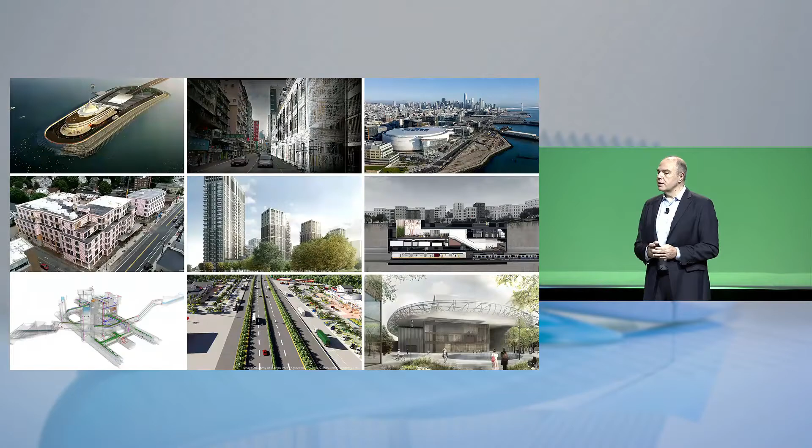Today we are going to give 11 awards to all of you, or some of you, and we are going to do 3 things. The first thing we will be doing is reward, honor and celebrate your work. We're going to give 9 awards for the AEC Excellence Awards, organized by size - small, medium, large - and then building design, infrastructure design, and finally construction.

That's the first one. The second one will be about celebrating the Innovator of the Year. This award will go to one specific person who drives innovation and process change within his or her company. This winner has been selected among close to 40 different nominees.

The third thing we will be doing is about a new award that we are introducing this year, the Future of Making Award. In this case, we want to celebrate a company that has been driving automation and new technology and has innovated in the world of AEC. That's a new award that we will celebrate as well.

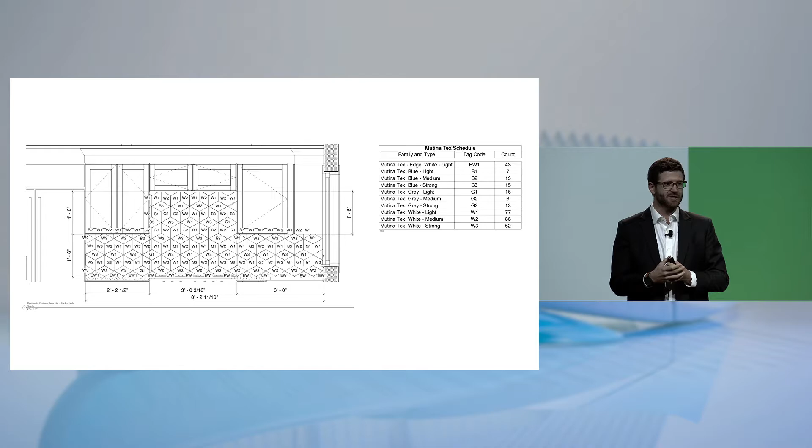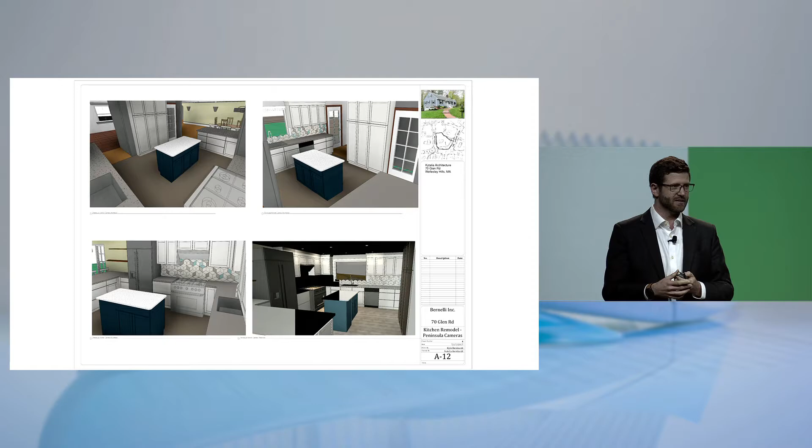We did that in BIM 360 Design, and my contractor definitely thought I was crazy when I handed him a URL in BIM 360 to actually place each one of those things manually. But what we learned, and what I think these awards will tell you all, is that some time invested to author the construction intent of your design digitally helps to make sure the end result is what you want, and that is perfection - with one small detail, and that is I forgot to include my kids' dirty dishes in the LOD 400 BIM that I created.

So I'm going to need to put that in the punch list in BIM 360 for my next update, and probably spend about 8 or 9, 10 cloud credits to re-render the whole scene. But if you like my work, I got to be honest with you guys, because I've been working with Nicola for like 13 years, as he mentioned, and I'm always open to new opportunities, so call me.

But let's get into our first winner here. So we're going to start in the infrastructure segment, as Nicola mentioned. So let's switch over here.

As a parent of 3 kids, I have a special affinity for well-placed service centers on a highway, because my kids need to go to the bathroom all the time. And that's exactly what our first winner did, they used digital technology to help lay out an entire highway line. So let's welcome to the stage the winner of our first award, a small infrastructure project: engineering of the Luchuan service area of Yulin Zhanjiang Expressway. So please welcome up Tianjin Port Engineering Design and Consulting Company and CCCC First Harbor Engineering Company. Welcome to the stage.

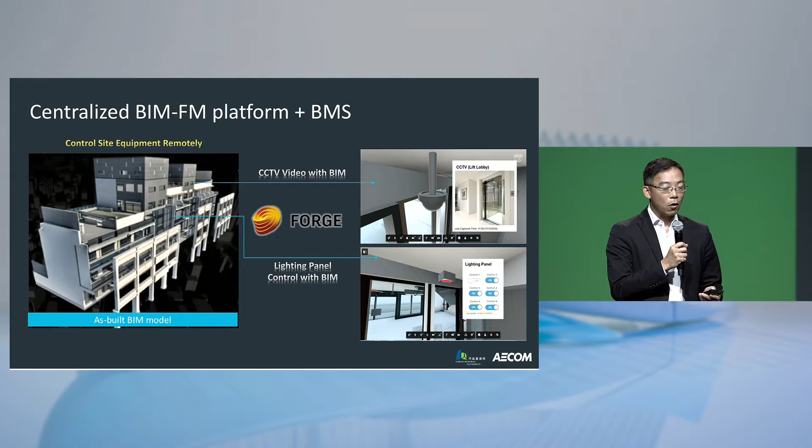So this is some sneak peek of our project, the screen layout. This is the first page of our project. Project stakeholders can make use of this dashboard to navigate to every single project within the platform easily within a map click.

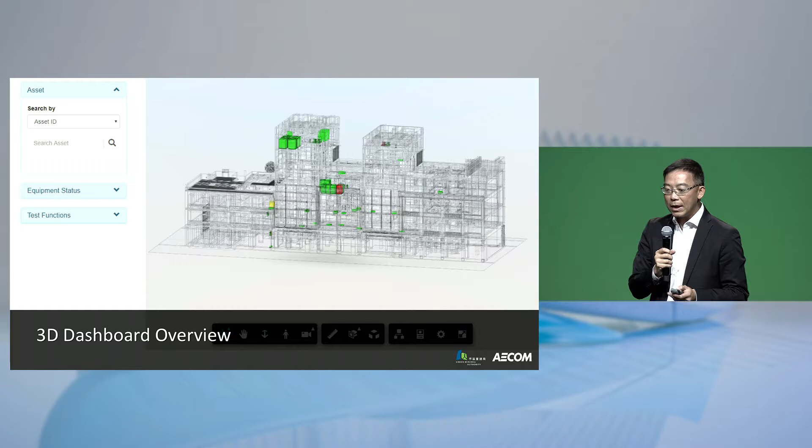And this is a 3D dashboard overview, which is a highlight for the project. We will have all the real-time equipment information showing on this 3D viewer, which is a Forge viewer, and then we have all the real-time information pop up to show you the status of the equipment.

So to conclude my presentation, I'd like to share with you my project video.

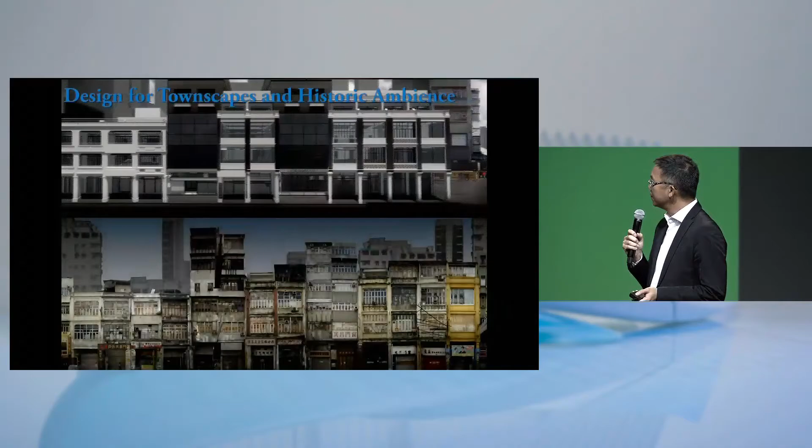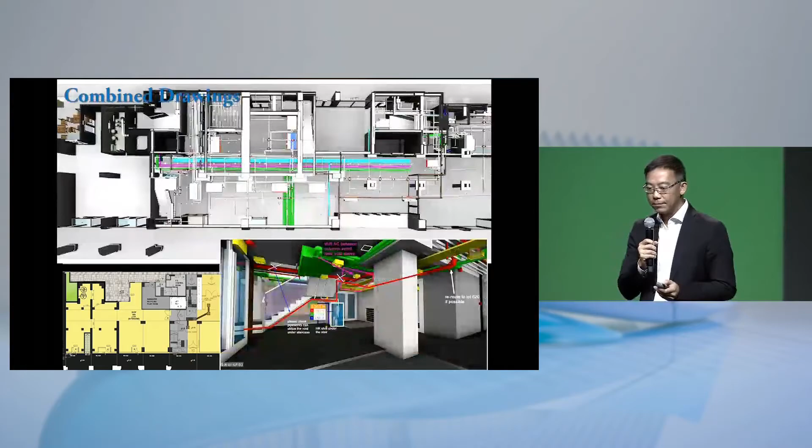So this is the old days. Actually, we have a lot of historical stuff like the columns we have to preserve. This is an early stage adoption within design and construction stage of BIM technology. We also did a lot of analysis like the solar analysis, shadow analysis, and of course clash analysis and drawing production. And it becomes the integrated platform on the cloud with Forge Viewer.

Yeah, this is a very congested area within Hong Kong.

So this is the video viewer that I mentioned to you with all the real-time information pop-up, the live CCTV feed and the dashboard information.

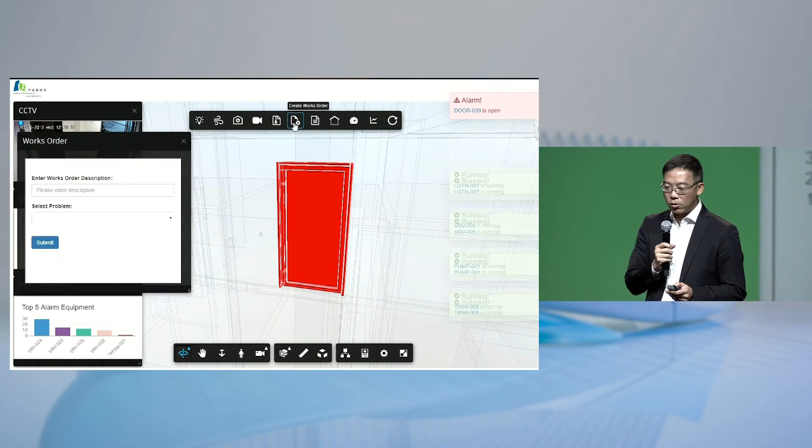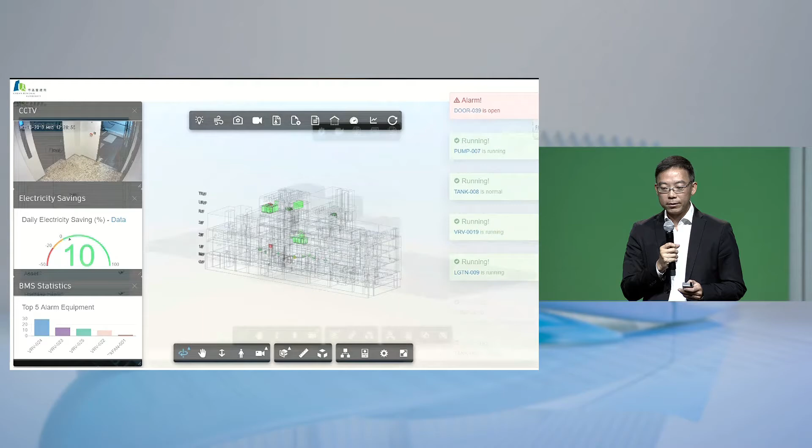So this is an asset history with all the manuals connected to the system. The frontline staff can review all the information easily within a few clicks on the viewer.

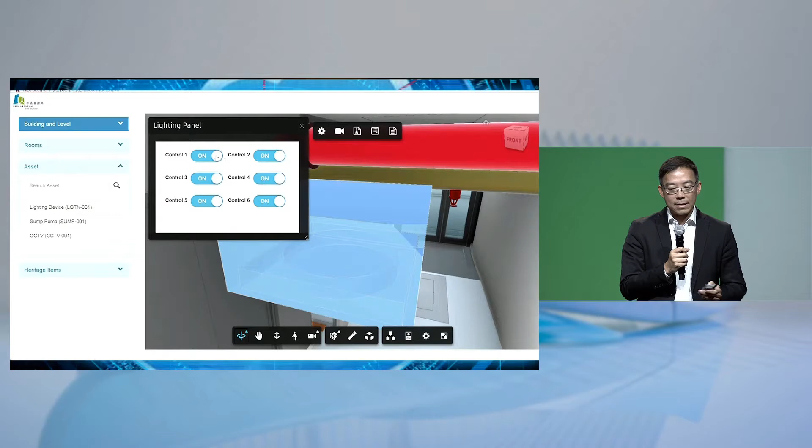And we also connect to all the BMS sensors so we can connect and control the lighting, air conditioning, and all the BMS-enabled sensor equipment. Toilet is one of the very important things that we have to monitor because it's a public accessible building. So this is what we have prepared for the last year, the project.

The system will be available by end of this month together with the building. But this is just the start of our smart building journey because there will be a lot of buildings joining the platform in the near future. Thank you. Thank you again, and thank you Autodesk for the award. Thank you.

That was a great illustration of how investing in Forge and the Autodesk ecosystem can help you do great things. So for our next winner, you'll see how modular construction can help a project work like clockwork. The project team took an advanced tech-first approach that used drone mapping, laser scanning, 4D planning, and mixed reality. They did it all in my backyard of Beverly, Massachusetts.

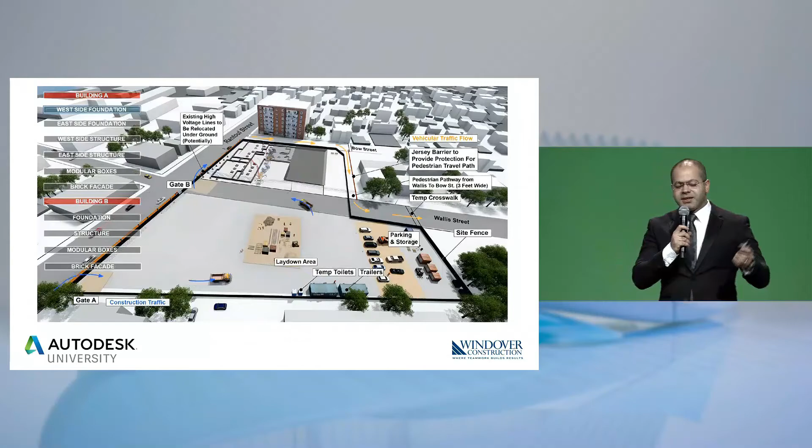Windover has been a leader in modular construction. This project is 184 boxes that got placed for 2 buildings. Building A, as you see down there, is the U shape, and building B is the smaller one. So what we did is that we placed all the boxes virtually first before we put them on site to make sure there are no surprises on site.

So the challenge for this project was that, as you see here, this is an aerial view, this is building A and building B on the other side. The challenge we had on that project was that we have a steel structure podium on the first 2 floors holding up the 6 upper floors that are modular construction. So we have 2 different structural systems that needs to be in harmony together, very well coordinated.

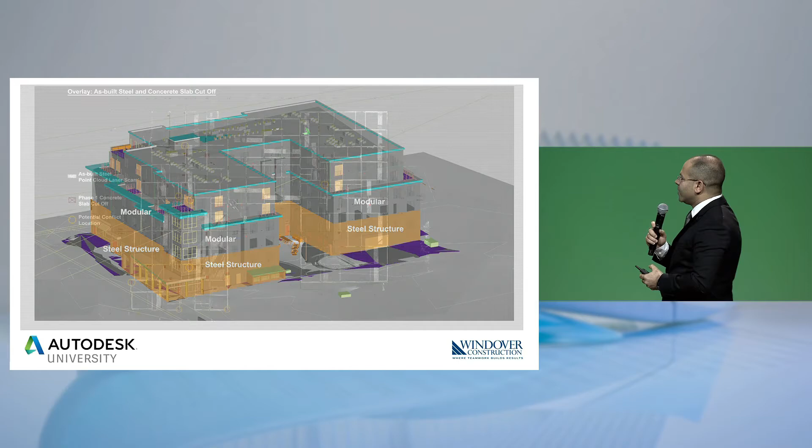The first 2 floors are coordinated through the regular plumbing system with pipes going up through the vertical cores, and the upper floors are made in a controlled factory setting to control quality and get the boxes ready in the factory. So what we did is that we made sure to coordinate everything by capturing on-site as-built steel. So we are not coordinating with drawings for the steel, we are coordinating actually with the as-built steel on site.

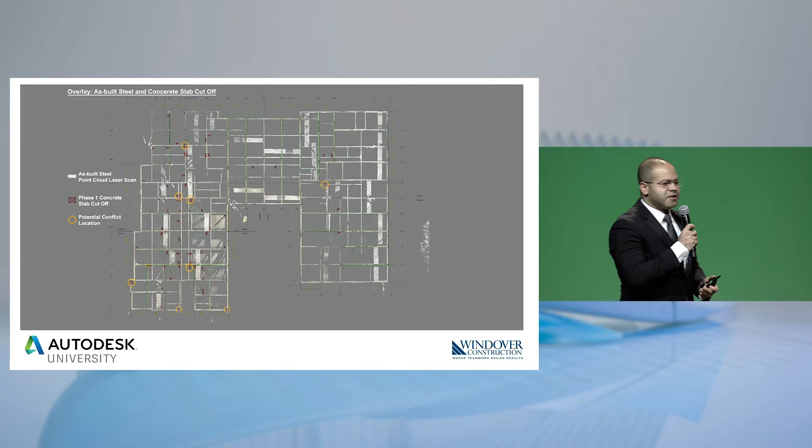Every time we had the steel structure erected on site, in 6 phases, we'd fly the drone with controlled survey points on the ground. The drone captures the aerial view of the as-built steel, and we supplement that with scanning on the ground to capture whatever the drone didn't.

We combined both point clouds in ReCap Pro to get an accurate representation of the as-built steel on site. Then we took that further and modeled in Revit all the MEPs for the lower and upper parts. We communicated after each of 6 flights over 2 months in phase meetings with the factory making the boxes. When we overlaid the data, what you see in red is where the factory was planning to put their vertical shafts.

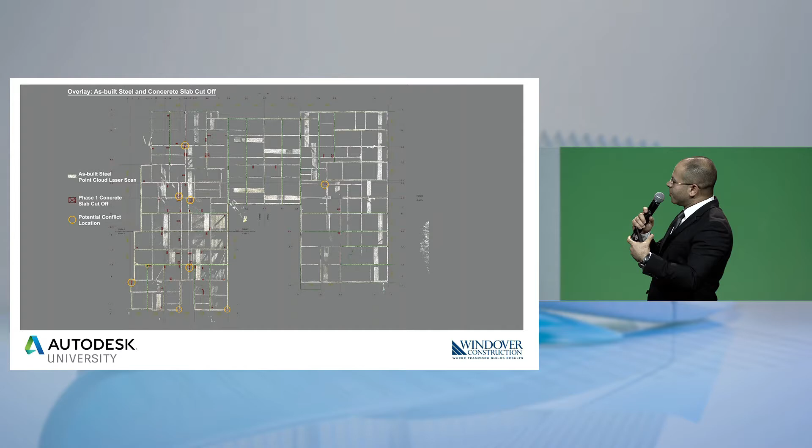We were able to overlay that in real time with what we captured on site to help detect conflicts early in the process. We made sure that when we placed those boxes, everything fit perfectly between the lower part built on site and the upper parts built in the factory.

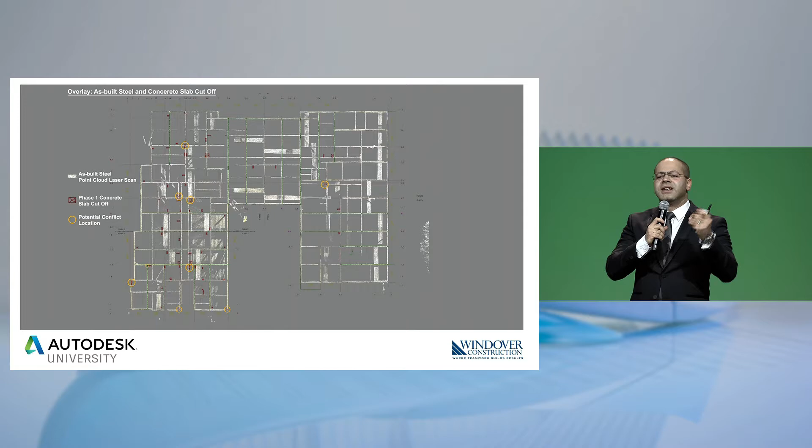Another innovative way we used Civil 3D was to get the spot elevations for the facade. When we place those boxes, sometimes the facade isn't very smooth. So in real time, we communicate to the facade team the strapping thickness through laser scanning the facade, using a laser scan accurate to within 3 millimeters every 70 meters.

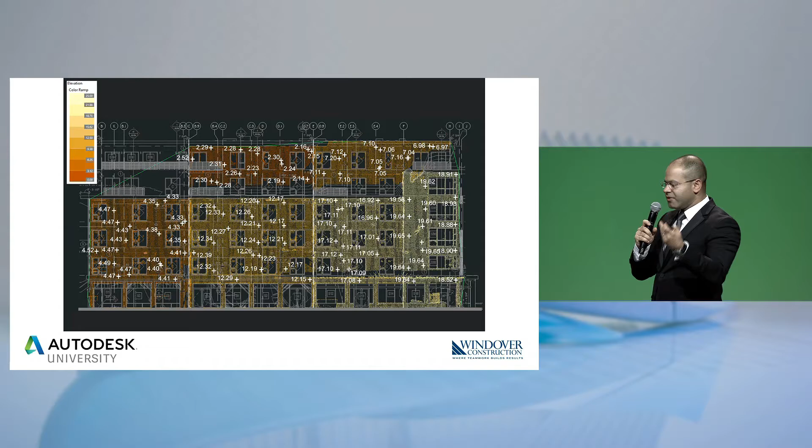We were then able in Civil 3D to detect the spot elevations and communicate that in real time, ending up with a high quality facade that preserved the design intent, very smooth. We also used BlueBeam on that project. Our superintendent Dustin loves BlueBeam because it helps with collaboration on site and really helps with real-time communication.

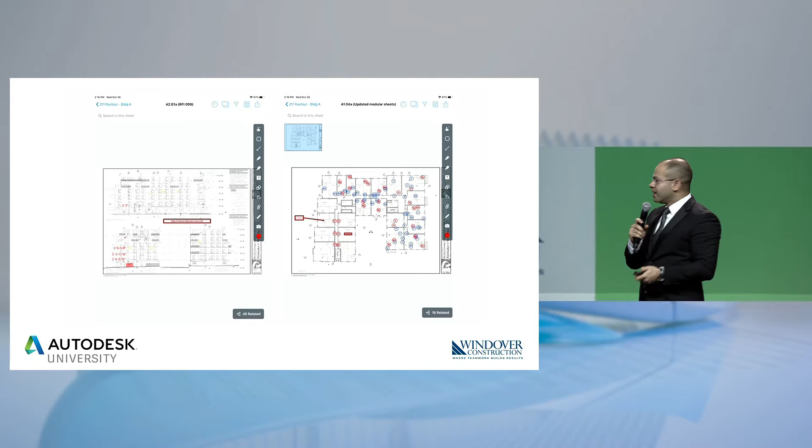That was our project, and it wouldn't have been possible without mastering all the Autodesk software and the great options we have. We used AutoCAD for early drafting. We used ReCap Pro for combining drone mapping and laser scanning to get an accurate representation of the site, combining drone maps with laser scans from below at different tolerances.

That was really amazing to have these together. We used Navisworks for MEP coordination, Civil 3D for spot elevations and for handling the contour maps and contour lines we captured from the drone, for early excavation work, monitoring, and keeping track of construction progress. And 3ds Max for animations, 4D, and visualization.

Revit is where everything starts. When we build those 3D models, it's all in Revit - it builds these information-rich models. And of course, BlueBeam. So thank you so much.

We're glad to be part of this - modular construction is transforming the construction industry, making it greener and more efficient. What Windover is doing is transforming modular construction planning to help build better and safer. Thank you so much.

That was really cool. I love modular design. It's really obvious that's going to be part of the future of making - something we talk so much about here at Autodesk University. So let's switch to our next project, which reminds me of one of my lifelong battles, starting in 4th grade and continuing till right now - the battle to deliver the coolest virtual city.

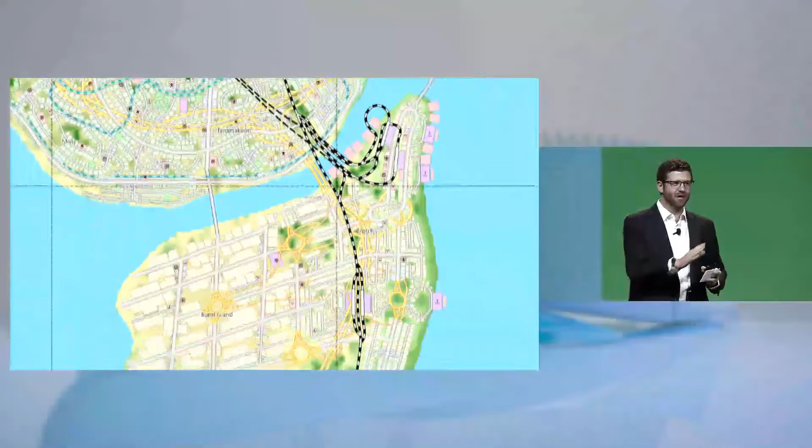They designed a 16-kilometer rail line that had to connect to 5 existing metro lines. Some of this was virtual, but in a very real world. Congratulations to the winner of our Medium Infrastructure Design Award: the Istanbul Rail System Design Services Phase 1, by Yüksel Proje and Istanbul Metropolitan Municipality. Congratulations.

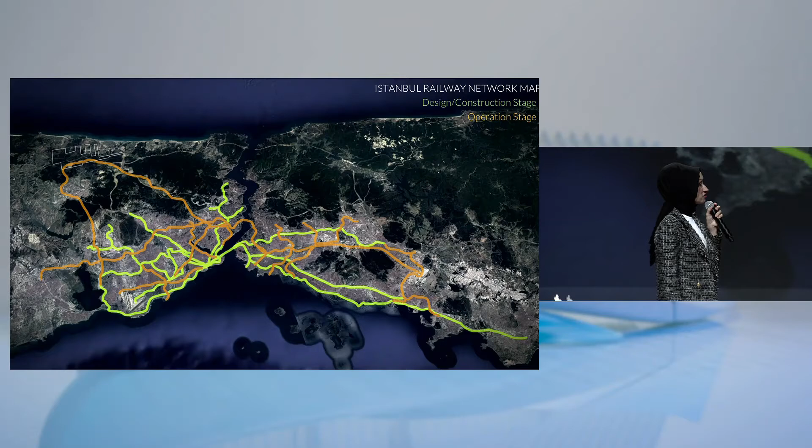As the Istanbul Metropolitan Municipality, we are working with dedication to solve these problems. The Istanbul Metropolitan Municipality is committed to developing a high-tech public transport network by implementing innovative and sustainable solutions. With this motivation, the railway system in Istanbul will reach approximately 450 kilometers within 5 years.

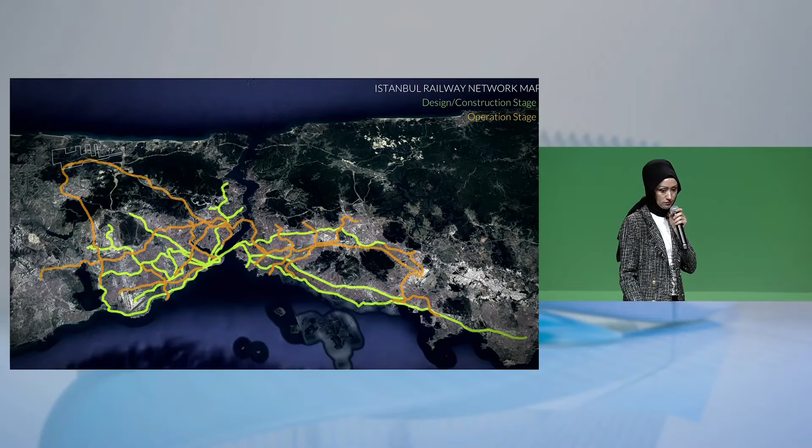Istanbul Rail System Design Services plays a vital role in achieving this goal. It involves the design of different rail system lines with a total length of 60 kilometers. Phase 1 involves the construction of a 16-kilometer metro line, comprising 11 stations, also integrating with 5 existing metro lines.

The project includes the collaboration of different entities, development of feasible solutions, implementation of operational and maintenance activities, while increasing technological knowledge. Most importantly, we reached our highest level of work through integration of all of these aspects and experience at the beginning of the design. Our main objectives were smart transportation leading to smart cities, sustainability, building information modeling and innovation, 12 different disciplines, multiple locations, 100+ models, and 20 Autodesk tools. And the result is, let's have a see.

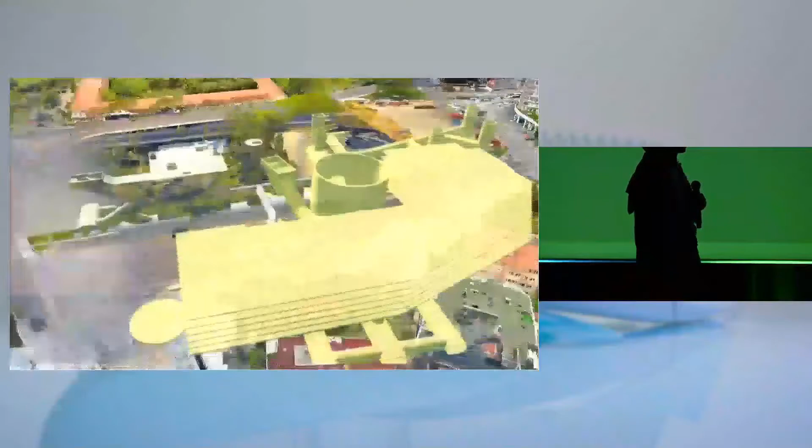Such a nice film, isn't it?

Not everyone is with us today. I would like to thank my friends who participated in this project, my colleagues at Istanbul Metropolitan Municipality, and the designers from Yüksel Proje, as you see. Also, I would like to take this opportunity to thank Autodesk Turkey, Özgür İleri and Niyazi Kemer, especially for their encouragement and support. I strongly believe that we have achieved this success as a team. Thank you very much.

Leave it there. You can leave that there. Okay, cool. Thank you. Awesome. I'm gonna leave it here.

So I couldn't help but notice BIM 360 design and specifically design collaboration in that video. That's awesome. On behalf of the team that I worked with to help build that, it's great to see that being used out in the real world.

So let's switch gears here a little bit and think to the times we've worked with owners. I don't know if anybody in the audience can remember a time an owner asked for 3 months extra time on their project. Can anybody think of a case where your owner said, I want my project to take longer? Yeah, I can't think of it either. And this next project actually shaved 3 months off the overall schedule time. So let's get right to it.

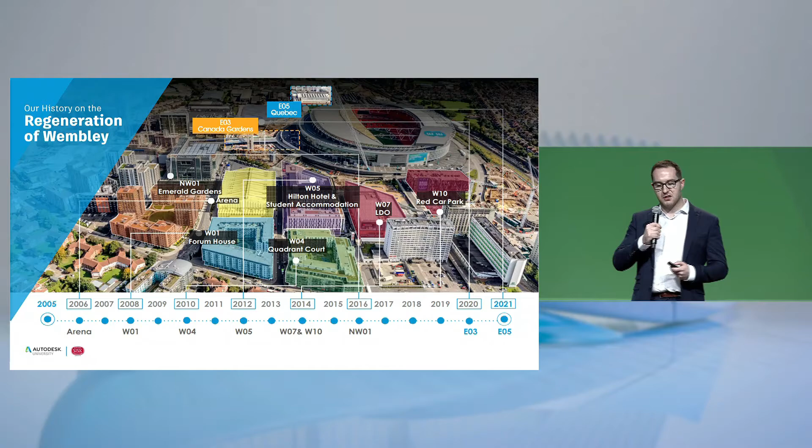Currently, we have 2 live projects with a total build cost of £425 million. Our ongoing projects within Wembley Park are 2 high-rise residential developments, set to provide an additional 1,200 residential units to the area. Today we'll be focusing on the larger development, E03 Canada Gardens, where we ran our trial using BIM 360 to create a set of digital smart containers.

The project itself is 743 PRS apartments spread across 7 different buildings. It's got a landscape podium, an energy centre to provide district heating to the whole area, and a coach park which will have the capacity for 81 coaches on an event day.

Data is the new oil. It's only useful when it's refined. The main challenges we faced came down to the efficient refinement, access, and sharing of information throughout the site. These challenges included getting information to operatives on site with relative speed and ease, the lack of live information available, no access to 3D information on site, ensuring all the information is accessible within one platform, and limitations with communication between project sectors. Drawing from our philosophy, our goal was to ensure the management of this information created zero inefficiencies throughout the life cycle of the project.

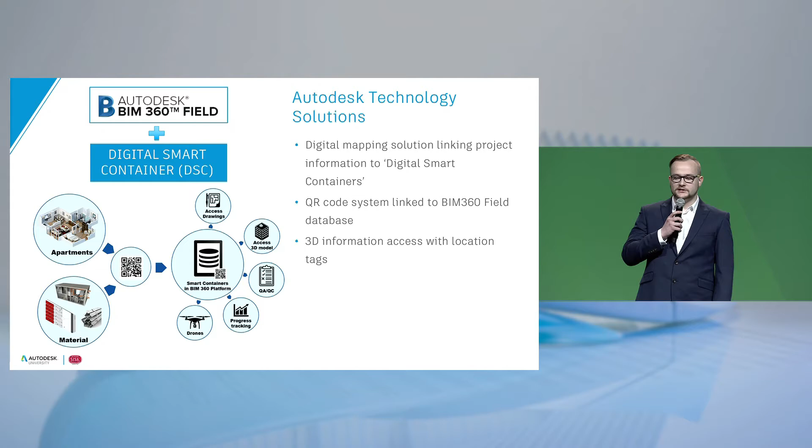We accomplished this by utilizing the capability of BIM 360 Field to create the aforementioned digital smart containers. By hosting these within BIM 360, we can access all relevant data by scanning a QR code associated to a flat or material container, giving our team access to the latest information relevant to their location on site, along with access to live tracking and dashboards of materials and spaces.

To effectively manage this new process, we developed a cloud-based API with support from Autodesk to link all the data from our CDE to BIM 360 automatically, and provided all of our site operatives with digital tablets. Shown here is an example of our live project dashboard, where all the information from site can be summarized into easy-to-view infographics and filtered to whatever level of data you require.

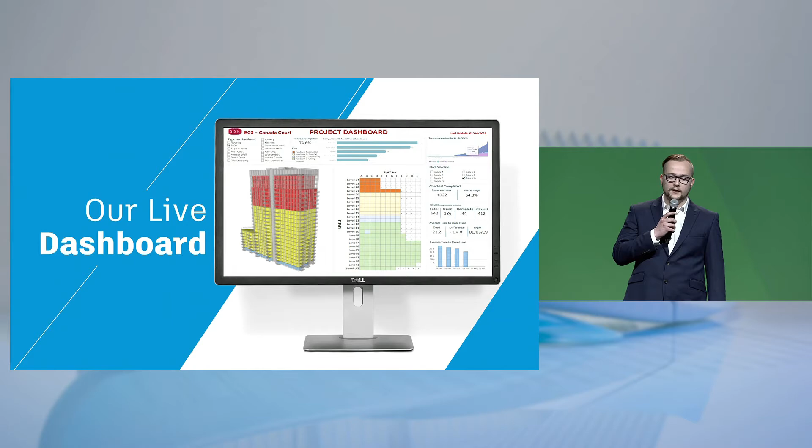From the implementation of these new processes and workflows, we were able to achieve a 35% time saving whilst conducting our QA/QC process versus traditional methods. This saved an average of almost 14 hours a week per user, freeing them up to perform more high-value tasks and ultimately enabling them to go home and spend value time with their loved ones. We are currently in the process of handing over another block from E03, and we are 4 weeks ahead of schedule.

We at Sisk are also committed to the principle of sustainability. The use of BIM 360 has made it possible to reduce the paper usage on site by a massive 44%, around 19,000 A3 pages a year, contributing to a yearly reduction of CO2 of almost 150 kilos. This has also made us the first Sisk project where the snagging process is 100% digital.

Using the live project dashboards to display the information from BIM 360 has increased project management efficiency by 15%. All of the information is in one easy-to-navigate place, eliminating the time taken searching for and updating trackers and spending meetings updating the project team. There is one source of truth for all project information.

Finally, we have achieved an overall production efficiency of 21%, as shown in the table below. Our subcontractors are steadily becoming comfortable with the new system, and in the first 5 months, the time to close any issues in the project fell from 30 days to 20, and we are well on course to hit our 35% reduction by the end of 2019.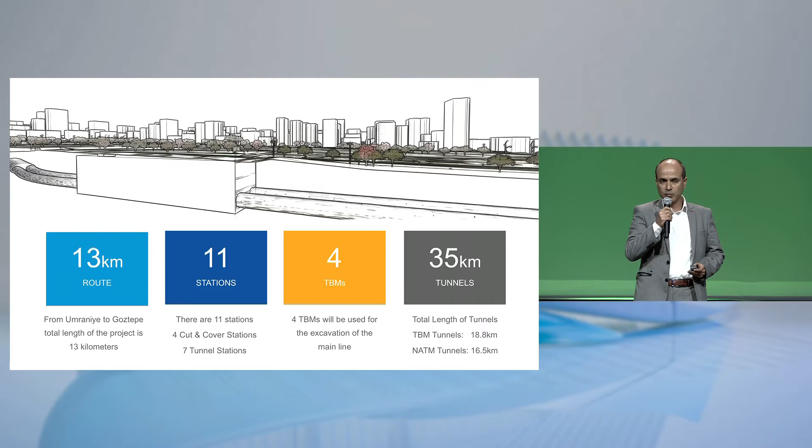Our line is about 13 kilometers long with 11 stations and a depot for maintenance and stabling of the metro trains. Mainline tunnels will be bored by 4 EPB type TBMs, and station tunnels will be bored with conventional tunneling method. This is a turnkey project which consists of design, construction, finishing works, track works, electromechanical works, signaling, and commissioning of the line.

Istanbul is one of the most crowded cities in the world, with around 20 million population. Like other populated cities, one of the biggest problems in Istanbul is traffic. Daily movement is about 13 million, and 25% of this movement is carried by metro systems. This is a figure to be increased.

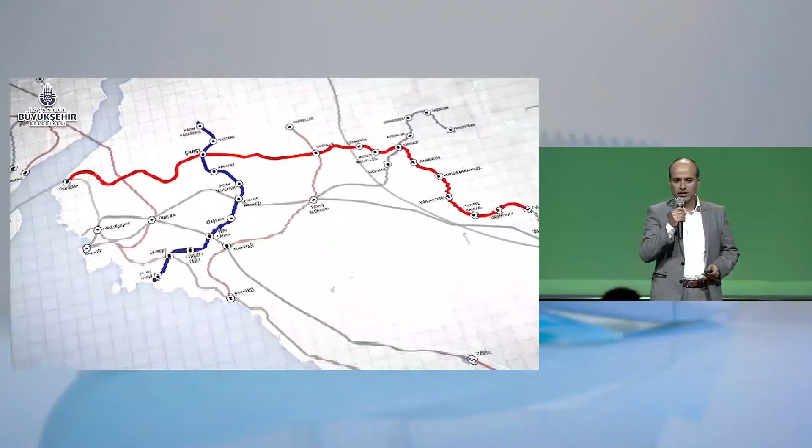Our line will play an important role to increase capacity of rail transit system in Istanbul due to its special location. Current metro lines, shown in red color, are located in east and west direction, and our line, shown in blue color, is designed in north and south direction. Therefore, our line will have intersection with 4 metro lines at the same time, and will have a big contribution to establish a metro network in the Asian side of Istanbul.

Capacity of the line is 44,000 passengers per hour per direction, and total daily expected passengers is about 500,000.

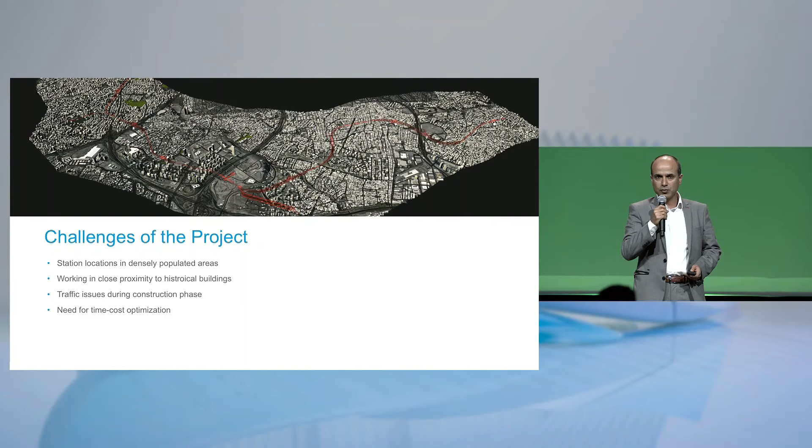As may be expected from a large-scale metro project to be implemented in Istanbul conditions, our project contains many challenges. Some of these challenges are as follows: north and south sides of the line are passing under mostly populated residential areas, and the middle section is near finance and business centers. Tunnels to be bored in the project will pass under approximately 1,600 buildings.

Due to dense placement of the existing buildings, the only available places for construction are existing roads and limited spaces between buildings, which is a big challenge for construction. There are also some historical buildings like mosques and station buildings under the effect area of the tunnels, where special care is to be taken during tunneling.

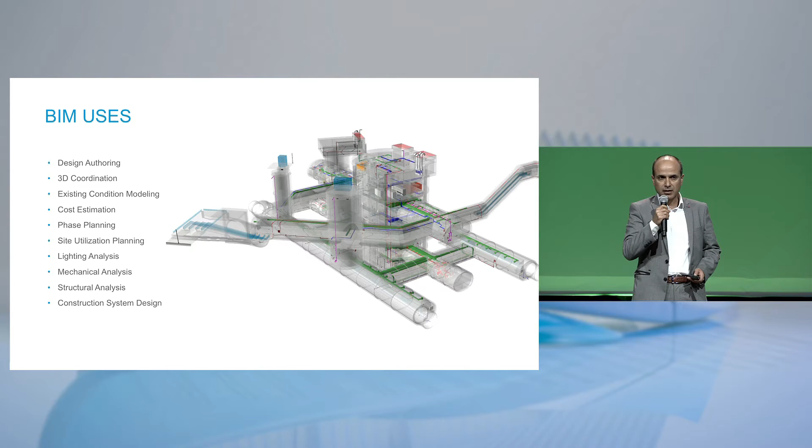BIM technology helped us to overcome the mentioned challenges effectively. Autodesk solutions made every step easier for us to implement BIM uses. Using related software, 3D information models were created. Interdisciplinary coordination was provided by using these information models.

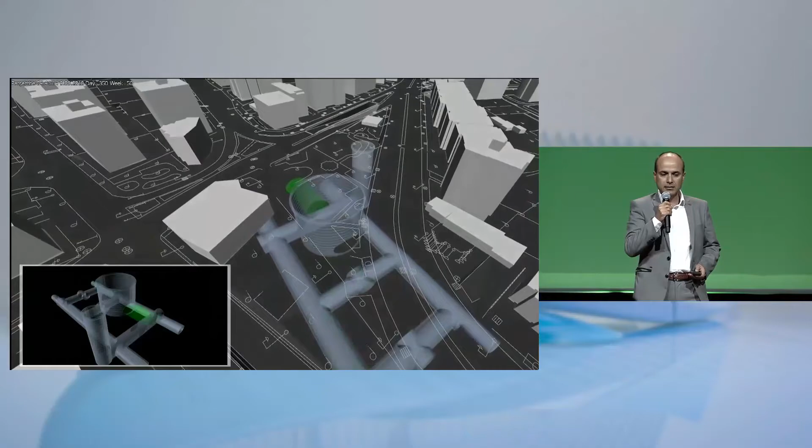These models helped us to overcome overspending and time loss during the construction phase and design phase. Construction and site utilization plan was made by using 4D simulations. Since headquarters of the contractor and the designer are in different cities, cloud solutions played an important role for collaboration and coordination of the companies.

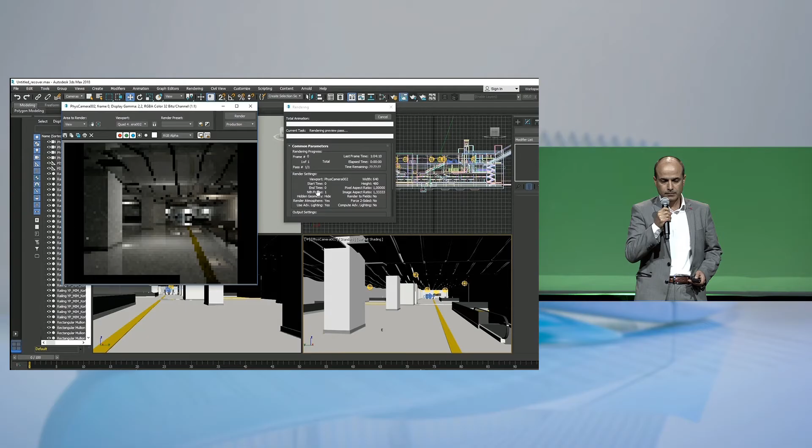At the end of this process, it was clearly seen in design stage that BIM technology provides cost saving, and it is also avoiding time loss. Errors and repetitive works were minimized, and collaboration and coordination were maximized between stakeholders.

Thank you very much again for this beautiful award and this great organization. This will be a great contribution for our BIM perspective. Thank you very much.

A common thing we've heard throughout all of these winners has been collaboration. And so our next winner takes that to the next level. There were 13 different member countries as stakeholders involved in this project.

It actually reminds me a little bit of a project I did with my fabricator. We designed a shed in Revit, and then we built it in a prefabricated way. My crew, which was my kids, they helped really well on this one. It was fun, we're very happy with the end results. Again, just a reminder, I'm open for any feedback, feel free to reach out to me because this is really cool stuff. But enough of that, let's jump to the next winner here.

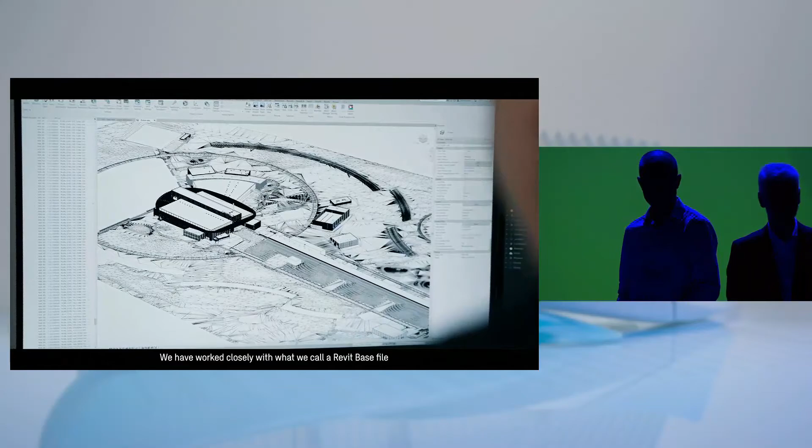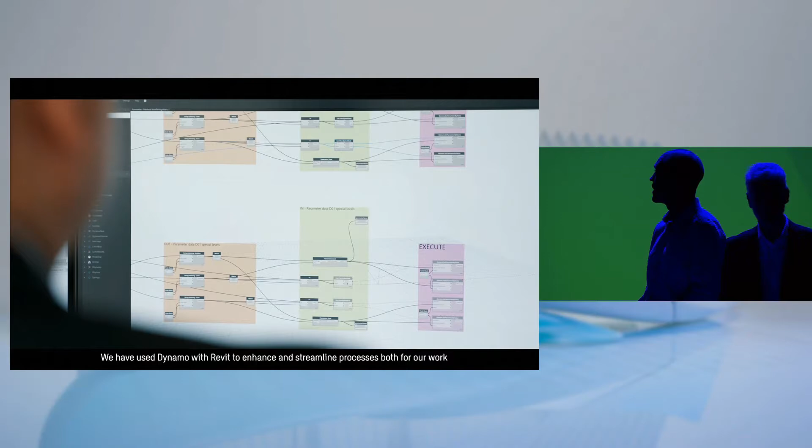This is a master file that contains everything that the designers need to deliver according to the requirements of the project. We have used Dynamo with Revit to enhance and streamline processes both for our work, but also created scripts for the designers to use and enhance their productivity. This process has enabled us to optimize time in several areas of the project.

For collaboration, we have regular coordination meetings with the designers and stakeholders. Navisworks Manage have been the main tool for clash detection and design review during the design and construction phase.

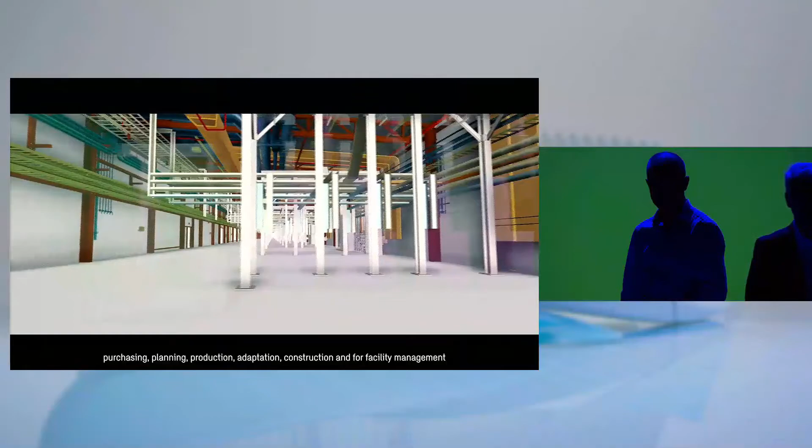In the project, we have worked with information chains. We use the same models throughout the process for design, calculation, purchasing, planning, production, adaptation, construction, and for the facility management. We have also developed software and processes that help us with the review of models, documents, and drawings.

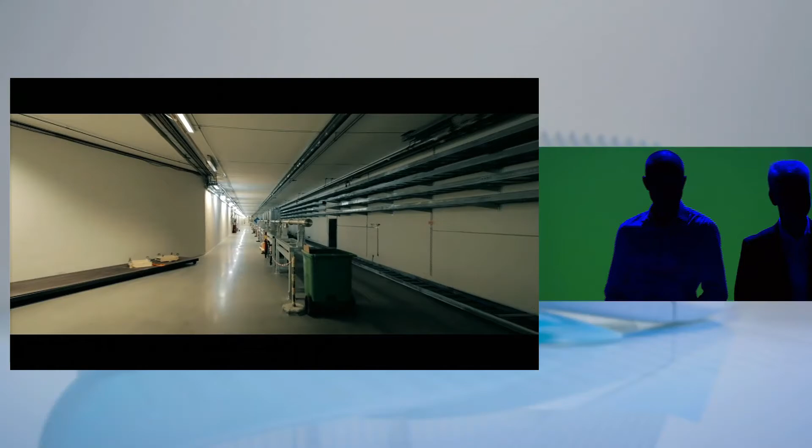3ds Max and Unreal Engine have been used for visualizations, movies, and virtual reality. Utilizing Navisworks combined with 3D Studio Max and Unreal Engine enable us to import stable models in virtual reality, which were used in the project as a tool for collaboration.

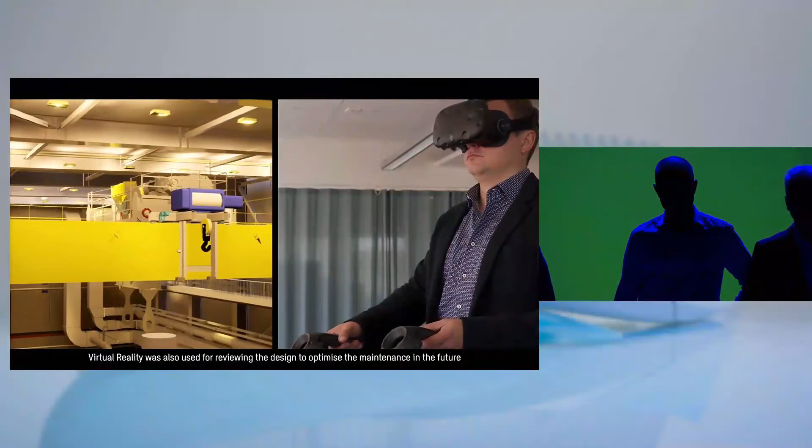Together with the client, we have explored and designed the future work environment inside virtual reality. Virtual reality was also used for reviewing the design to optimize the maintenance in the future and to be able to see where equipment best could be placed.

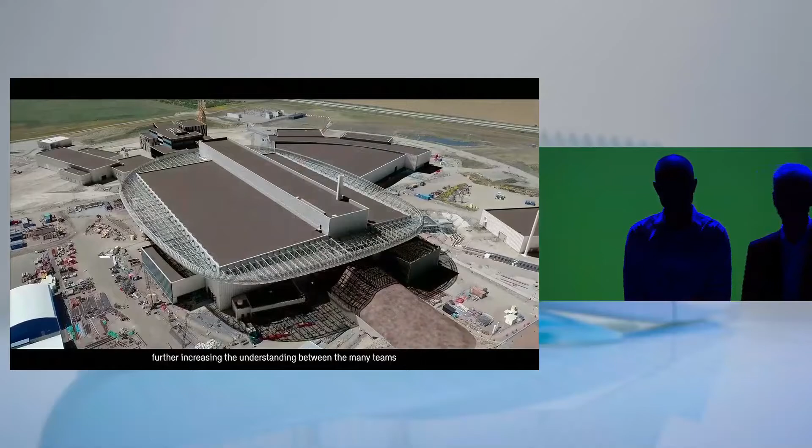Using camera 3D tracking with a drone enabled us to visualize the 3D model designs and actual surroundings many years prior to completion. Rendered contents from 3ds Max proved beneficial regarding the communications between design, contractors, stakeholders, and board of directors. With camera 3D content, we can provide enhanced experience with what the end result will be, further increasing the understanding between many teams within the organization as well as externally.

With photogrammetry, we have enabled building inspections by using 3D scanned buildings generated from Autodesk Recap Pro, cross-referenced with the as-built models from Revit and Navisworks. High-resolution footage generated from the drone was also reviewed for further quality control.

The European Spallation Source is an extremely unique project that will impact the world in ways that we can't even begin to fathom.

The construction process implemented by Skanska, for example, regarding environmental requirements in a project of this magnitude is a win for the planet and a great example for what can be done in every construction site around the world.

The BIM in this project has had its challenges, but we have managed to implement our thoughts and ideas, work through our challenges together as a team, and we are proud of the work and effort we have put in.

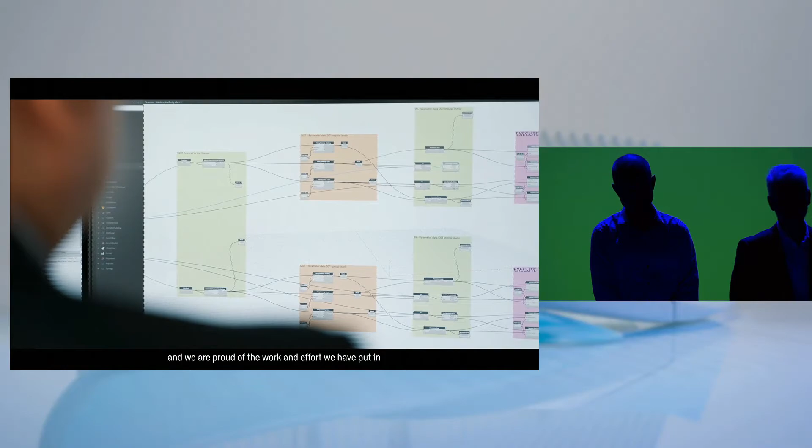Working on this project for such a long amount of time, you learn a lot about yourself and the people around you. We've all grown and expanded our skill sets along the way. We started this as strangers, and we'll finish it as friends.

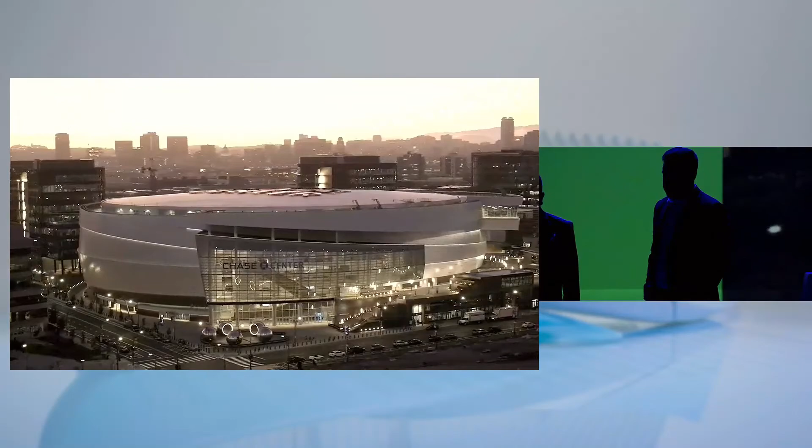So today we're going to be talking about automating the mundane. I'm Santino, this is Lucas. I'm a Texas native, went to school at SCI-Arc. Lucas is a Pennsylvania native and a Penn State alumnus.

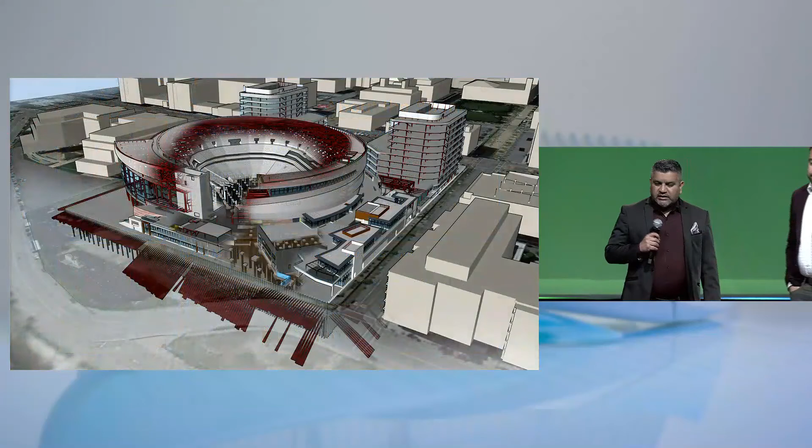Chase Center is a sports and entertainment venue that serves as home court to the 6-time NBA champion Golden State Warriors and as a backdrop to nearly 200 events annually, including Warriors basketball, concerts, family shows, community events, and more. The state-of-the-art 18,000-seat arena anchors a site that also includes 2 11-story office buildings, an iconic broadcast studio, over 20 unique retail locations, 3.2 acres of plazas and open space, as well as a below-grade parking structure.

Thanks, Santino. So now that you've seen how it all came together, I wanted to take a moment to dive into two high-level things that we did that are accessible to really any project.

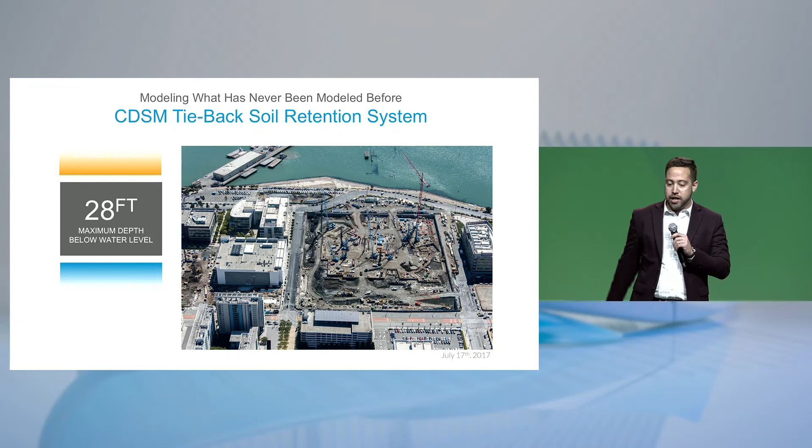To bring you into San Francisco, it's an 11-acre site on the south side of San Francisco, California, in the Mission Bay district. There's about 3,000 linear feet of perimeter and soil excavation that equated to 737 unique soil tieback systems. This allowed us to excavate 28 feet down below the San Francisco Bay, and remove over 350,000 cubic yards of soil.

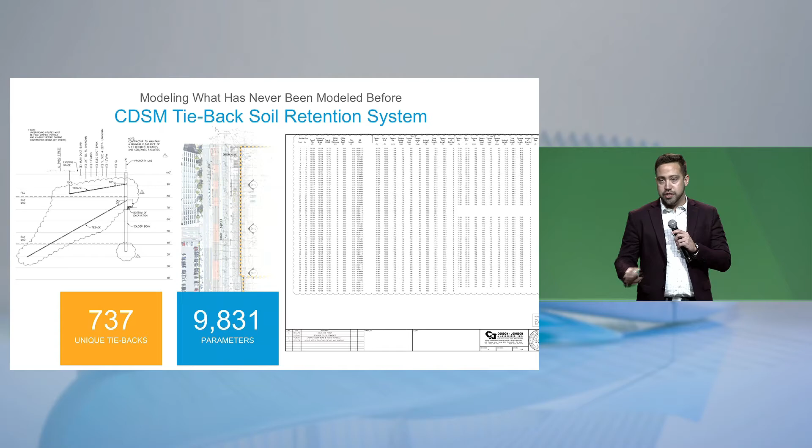So let's rewind a little bit back to these tiebacks. With 737 tiebacks, all governed by excavation depth, foundation type, and soil type, that equated to almost 10,000 unique parameters. And yes, those did change multiple times throughout the course of design and construction.

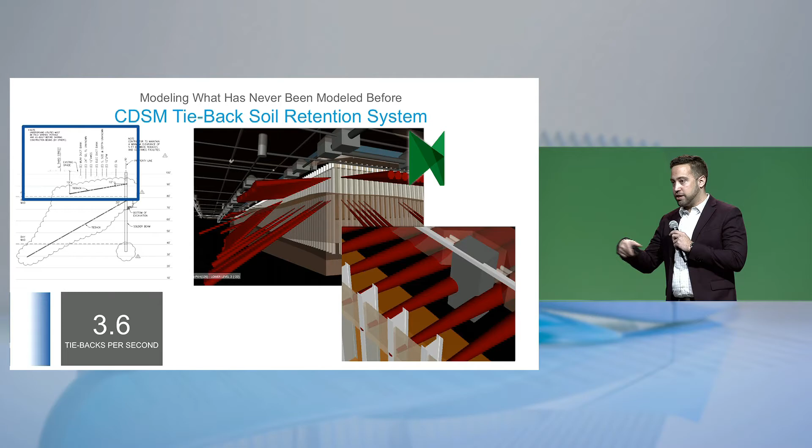But why go through the process of trying to coordinate something like that? Well, unlike other areas in San Francisco, the Mission Bay neighborhood didn't have the site infrastructure needed to support an 18,000-seat arena. So with the help of Dynamo, we were able to generate those 737 tiebacks in less than 3.5 minutes. That's 3.6 tiebacks per second, which allowed us to coordinate with site infrastructure that wouldn't be installed for months to come.

Keeping on that theme, we're taking information readily available to the project team, aggregating it, and implementing it in ways otherwise not used. Our precast stadia pieces, which are key to any stadium or arena, were part of the critical delivery of this project.

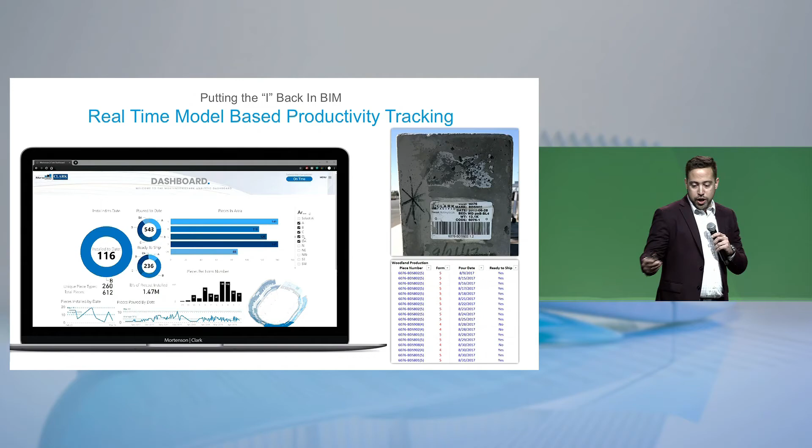We took information being tracked by our trade partner, Clark Pacific, and implemented it to build dashboards and communicate to key stakeholders when those pieces were fabricated, ready to ship, and even installed, since it was installed on night shift. This, while building nice dashboards, also built out what we called print maps that we could use to communicate to key stakeholders in a more physical way.

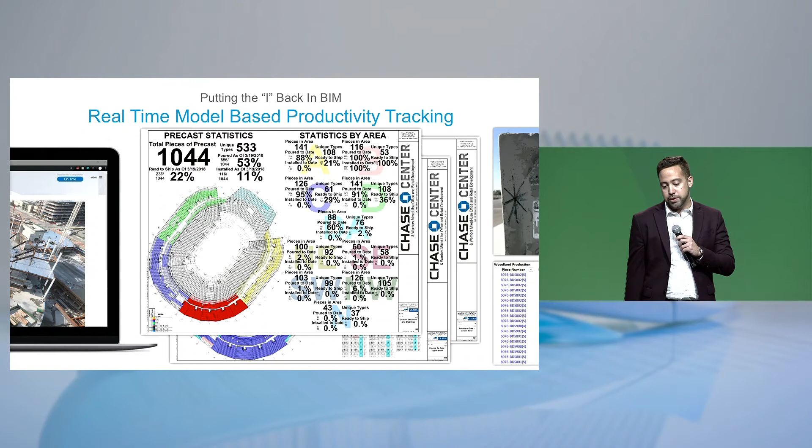These are just two high-level examples of some of the mundane things that we use the Autodesk suite to automate, coordinate, and collaborate on.

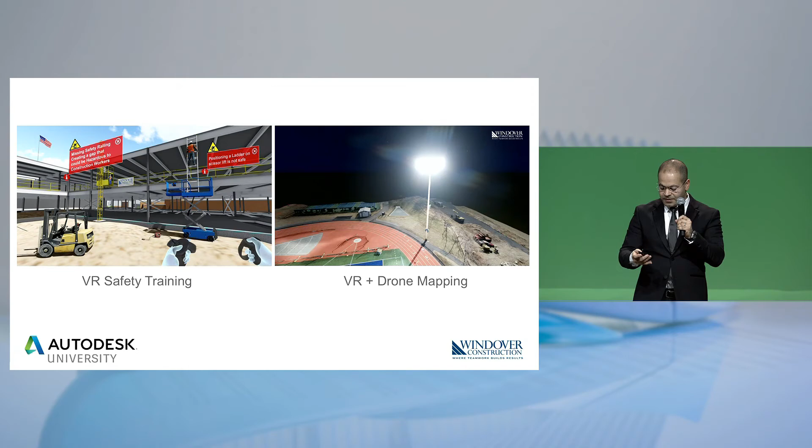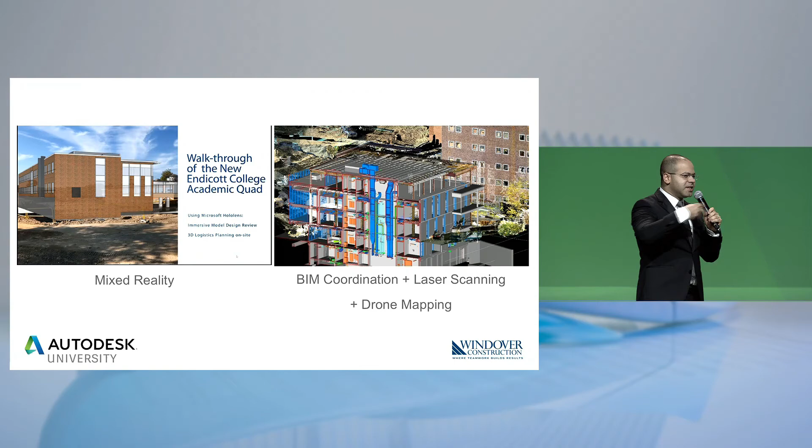Mixing reality on site, overlaying 3D models, creating this immersive experience for our clients and job site teams to really help offer real-time solutions and manage change of materials and design in real time. Combining all the data from laser scanning and drone mapping for BIM coordination—all to support building safer, quicker, and faster.

And all of that is only possible when you work in an environment that lets you really focus on what matters to be innovative. I thank Windover Construction for believing in me, for embracing new technologies. At all the job sites, when I talk to supers about new technology we're going to apply, they get excited and embrace it—we can try new things together. So I thank them for this culture of embracing new technologies and being open to it.

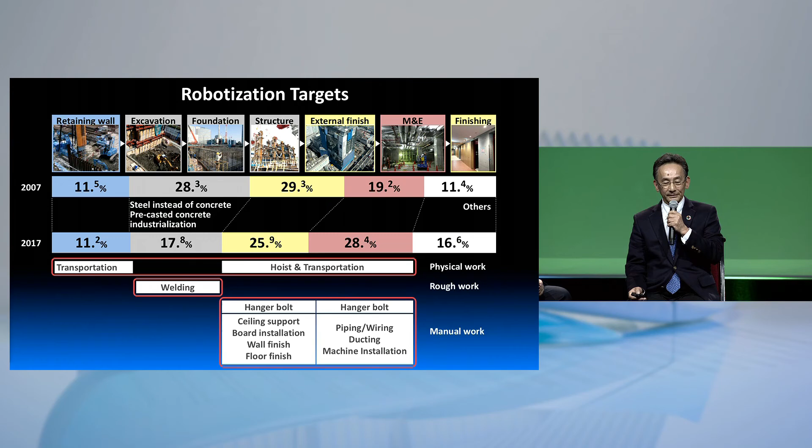Finally, we concluded to make three kinds of robots. One is robot carrier for transportation, one is robot welder for welding, and the third is a manual work Robo-Buddy. All these robots can move themselves, look and sense themselves, think themselves, and cooperate with each other under the RoboMaster Cloud, working reliably like a buddy. We try to make these human-friendly in design.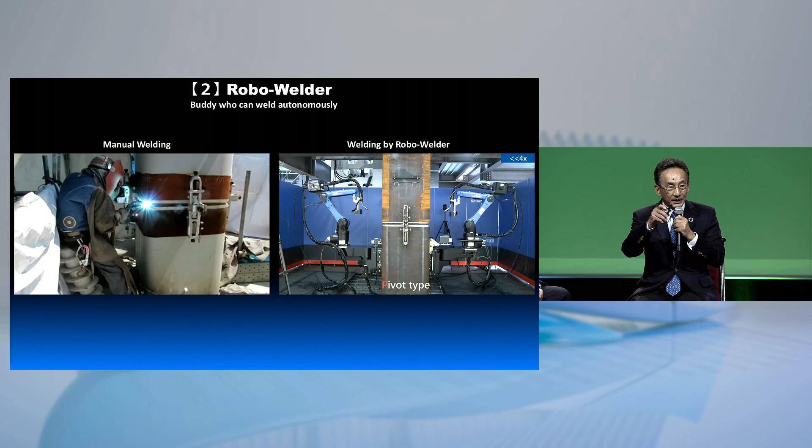Another one is a robot welder. The left side shows the traditional way of welding - he has to keep the position at the same speed and very accurate position. The robot welder scans the position before he starts, and also cleans up the head before he starts. He thinks about how to weld and simulates all the passes. After every pass finishes, he scans again and adjusts the welding, continuing this until finished. The third robot is a multi-skill Robo-Buddy.

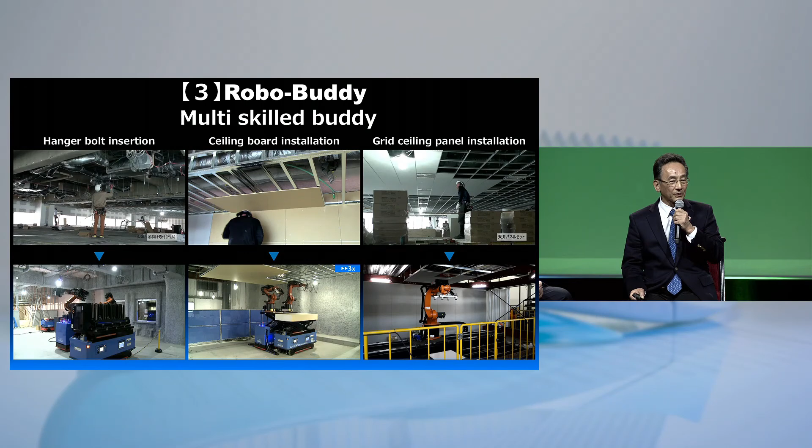With the Robo-Buddy, he scans the edge of the board and fixes the subframe with the other hand. Importantly, after installing one plate, they shift to the next position with the cooperation of the assist robot, moving together under the control of the RoboMaster Cloud.

All right, okay. Isn't it cool? Yeah, please give a big round of applause. Thank you so much.

I love it. And what you see here is still in the labs, but I was lucky to see it deployed on a construction site, so it's something that's happening for real. So what's next? Where are you taking the technology?

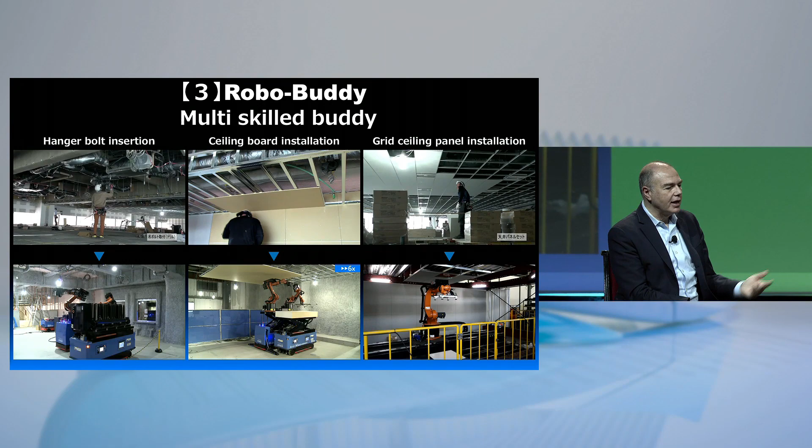We already use 10 of the robots this year, and it's very efficient with a good reputation on site. Every person is scared of the robot at first, worried about the risk, but after they use it, they are very appreciative of the robots. So we are going to increase the number of robots - next year, 2020, we are going to deploy 20 robots.

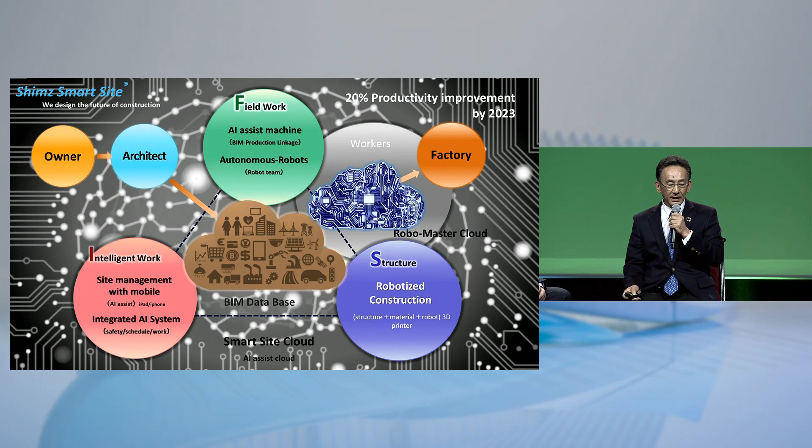This is our policy of smart site, consisting of field work and intelligent work for the management, and structural work for the design of the structure and material, under the control and database of BIM, and also the database of the RoboMaster Cloud.

My conclusion is these robots are 3 processes out of thousands of processes, and only the platform. We are going to apply deep learning to improve these robots through data collection, and develop applications through open innovation. The most important thing is these robots are made for people to be happy - more wage, more holiday, more comfortable conditions, more safety, and a wider diversity of workers. Thank you.

Thank you. Thank you. Thank you so much. Let's give him a big round of applause.